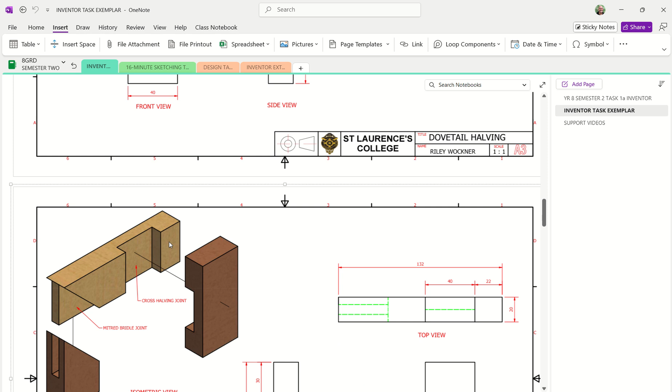So in this video, I promised to show you how we're going to convert that into that. This says it's having to draw the 40 by 20, okay?

So let's go back here. First thing I'm going to do is change the color of it to yellow pine. You beauty. And then I'm going to change the length of this. So we know that this piece here is 132 long.

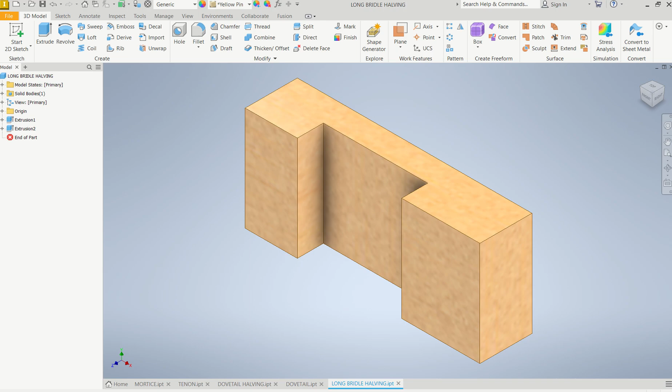If I come back here to my extrusion number 1 and edit the sketch, it was the 40 by 20, but if I edit the feature, that'll be the 90 mil. This time I'm just going to change it to 132.

There you go. And if I come back and look here, you see how this distance here was 22. So this cutout here is 22 millimeters in from the end. Remember this one here was originally 20 in from the end?

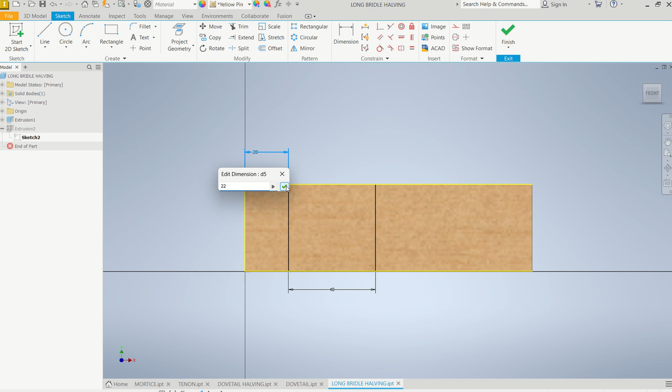What if I went back here to my extrusion number 2 and this time edit the sketch and say I want that to be 22 millimeters? See how it moves it along? Finish the sketch and you've done that.

So you know what? Inventor's really good. If you're smart, you can really work out ways how you can use old existing files that you've created, models or parts, and just rename them and edit the boxes where you can do that.

So let's go do this little cutout here, shall we? It's going to be another mortise, another tenon, a little bit like what we did here. It's sort of the same thing, but it's got this mitre 45-degree angle, I'll get to that in a minute. But I noticed that looks a little bit fatter than that one up there.

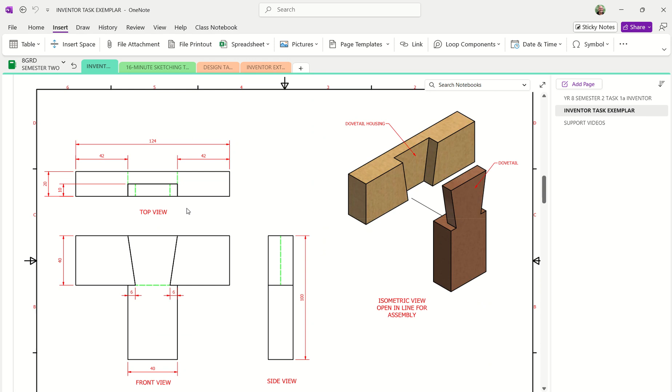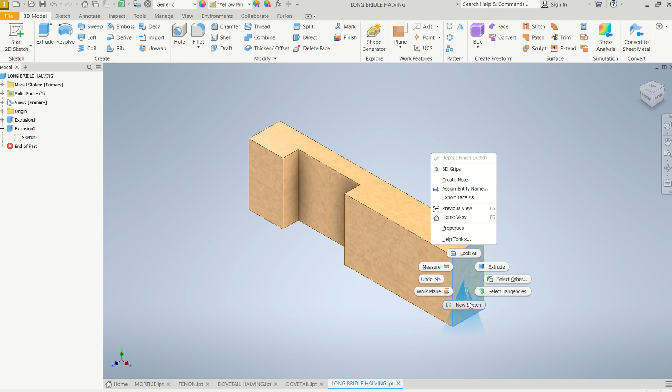And of course, how high is that going to be? Well, it's going to be 40. So let's come back over here and do a new sketch here. And you've done this stuff before, this is easy, isn't it? So we're just going to come up here, find that green dot, drag that down so it says 40, and type in 6. Let's draw another one down here.

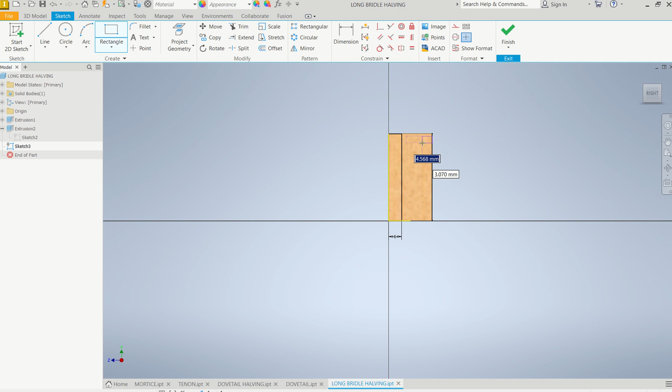Click on there, drag that down there, type... oh, hang on, I didn't find that green dot. Escape, do it again. Naughty Mr. Wockner. Here we go, there's the green dot there. See it's saying 40 there. Happy days, type in 6.

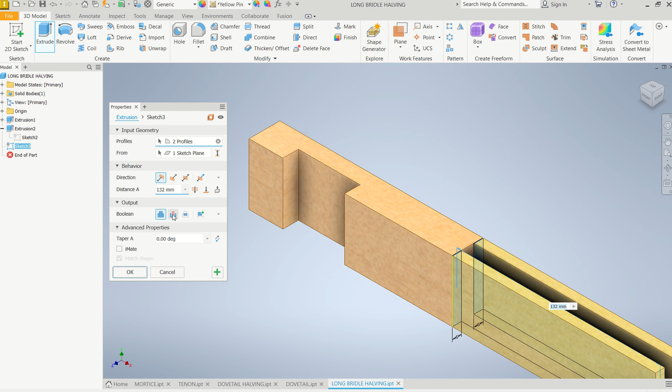Finish the sketch, extrude, and I'm going to cut it back 40 millimeters. Happy days. Now, what we need to do is spin that around like this. Okay, so it's looking more like the picture.

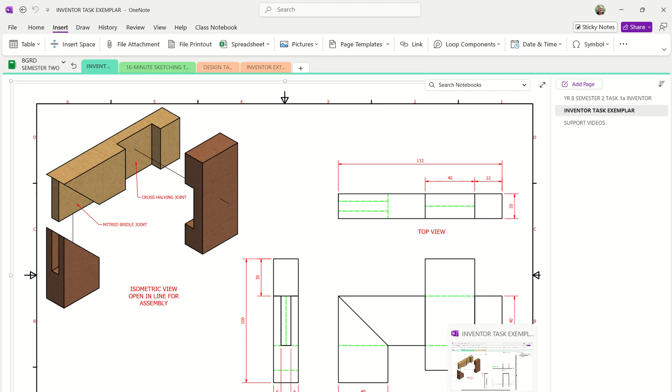We're going to put this 45-degree shape on there. So let's go ahead and do that. Again, it's a bit of a repeat of what I've got you to do before, so new sketch. And we're going to draw a 45-degree line from there down to there.

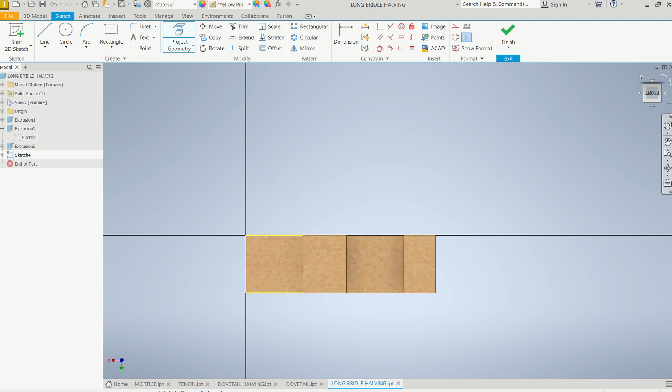But remember, a line alone won't extrude, we have to create a shape. So again, project geometry, click on that surface there. So now we've got a yellow line. Okay, and now I'm going to draw a line from there down to there. Okay, and then finish the sketch.

And then extrude. Well, I can come down here and click and pop that out there. Now I can bring that out 6 millimeters. Happy days. But what about the other side?

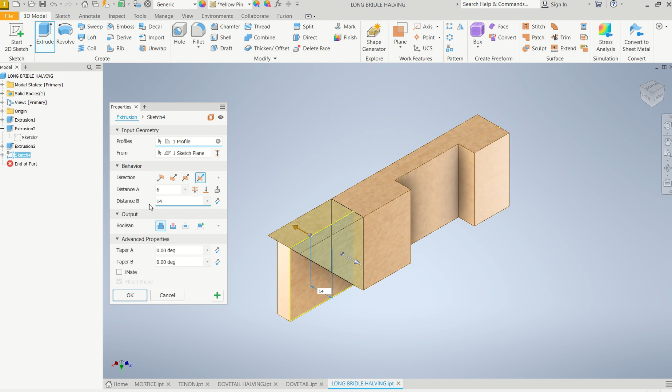Well, there's a command over here called asymmetric. And if you click on that, it'll ask you, would you like it to go the other way as well? And you say, yes, I would. I'd like it to go all the way across that 8 millimeters plus that 6 there. So how far would that be? It's 6 millimeters this way, it'd be 14 millimeters going that way. And we go, okay, and how is that looking?

The long bridle joint, it's that easy. So get that done for me now, please.